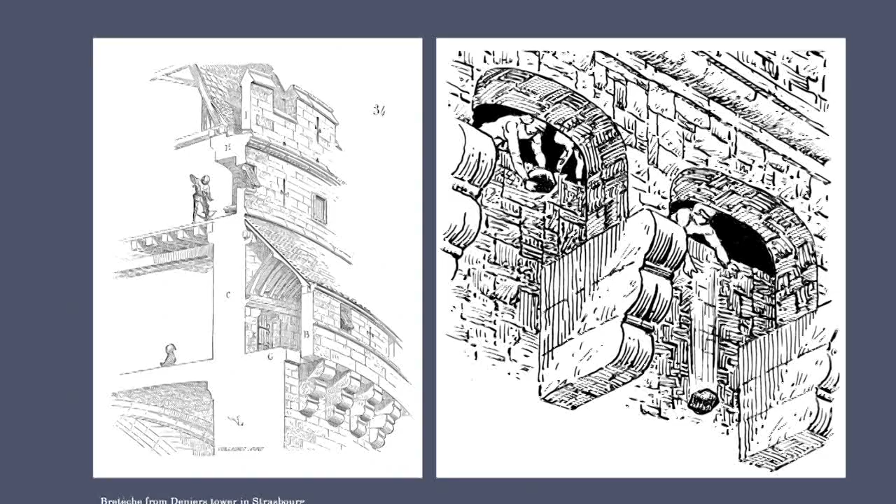From this cantilevered urban element, projectiles could be directed at the enemy, as you can see at the right-hand side of the image here. Soon, however, the balcony would become a more generalized urban element, no longer a place from where to attack people, but rather to address them, be it still from a very elevated and powerful position, as we can see in the St.

In other places in the world, the balcony seems to have evolved as a special form of window that establishes new relations between the street and the dwelling. The Egyptian balconies with mashrabiyas are a prime example of how a very nuanced but also very dynamic relation between the domestic sphere of the house and the civic sphere of the street was negotiated or is negotiated. The balcony with mashrabiya regulates the way that the domestic sphere of the house is in touch with the civic realm of the streets, but also vice versa. It controls the degree to which the public gaze and sound enter the sphere of the house.

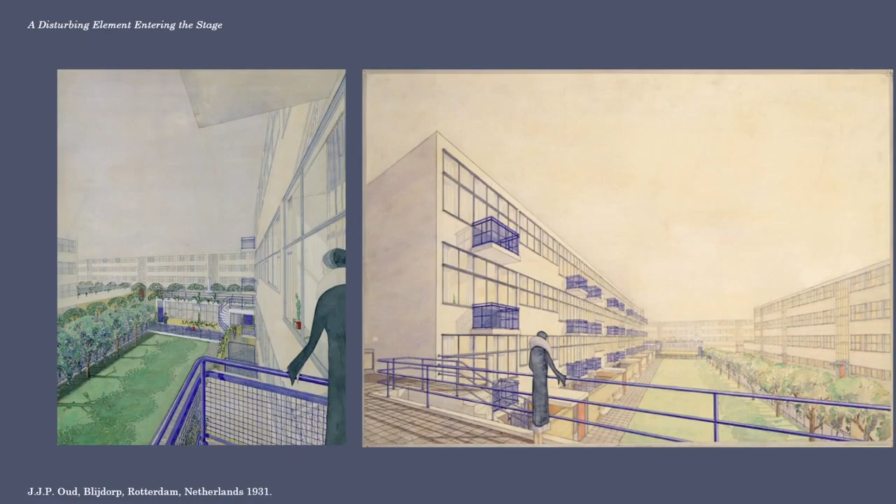Surprisingly, in the 20s and 30s, the balcony would gradually get a much more central place in several modern architectural discourses and practices. It became a sort of conspicuous feature of the modernist house, but also of the modernist city, as you can see here. Also in post-war architectural culture, the balcony would start to play a very important role in dealing with pressing urban issues. The balcony, for instance, became the architectural element par excellence to deal with the relation between the mass and the individual in a wide variety of housing projects.

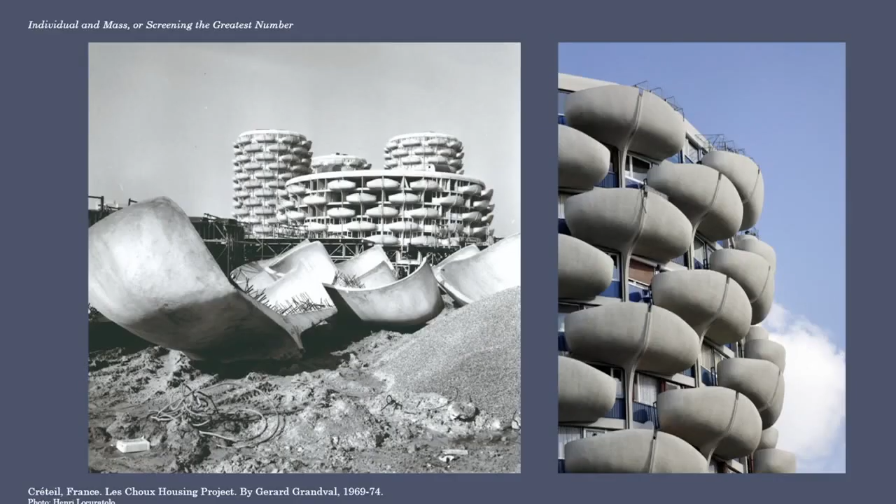The French architect Gérard Grandval offers an interesting example in his housing project called Les Choux in Créteil, near Paris. The challenge in these types of projects was the engagement with the new collectivity and the anonymity that emerged from these housing environments for an upcoming mass society. Supported by the evolution of precast concrete in France, Grandval proposed a system of petal-shaped balconies, which gave the buildings their unique appearance, but above all, installed a new figure of screening, the border between the realm of the individual and that of the mass, allowing as well a sort of visual engagement with the public realm of the city, and offering a high degree of privacy to the individual.

Almost simultaneously to Grandval, the Spanish architect Ricardo Bofill offered his view on the encounter between mass and individual, between monument and niche, we could say, for the housing project in Barcelona, the so-called Walden 7 project. In the Walden housing project, the monumentality of the apartment buildings is emphasized by treating them as a very big form, a gross form as we call that, with enormous cavities, as you can see.

And also here, the balconies played a crucial, and we could even say a paradoxical role. They appear as elements that remind, on the one hand, of a long Mediterranean tradition of outdoor rooms that complement the interior dwelling, but their small size also suggests a different reading. The balconies in this project, and you see them also on the plan, you can detect these very small balconies as well.

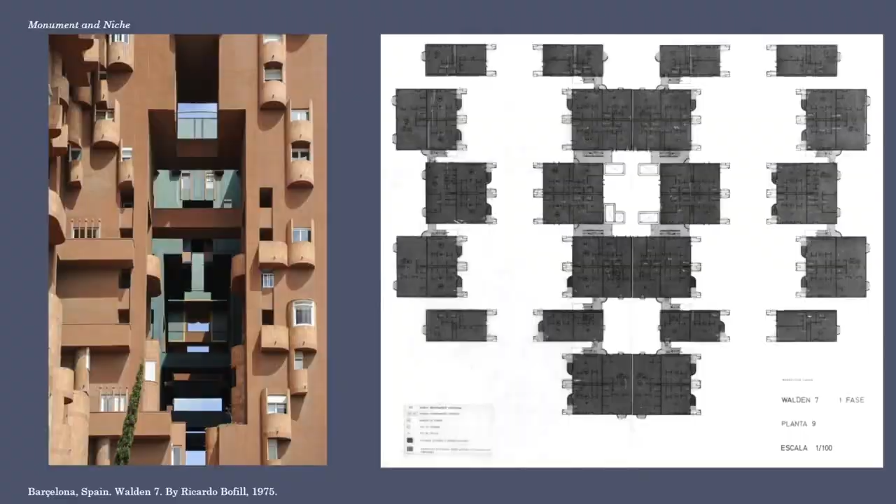The balcony would also play a very important role in the emergence of a new urban figure in the European metropolis, the urban figure of the modern skyscraper. And this was, for instance, the case in the project Torres Blancas by Francisco Javier Sáenz de Oiza in Madrid. Sáenz de Oiza was concerned with articulating a new collectivity and was interested in defining the European typology of a modern skyscraper. He imagined the balcony would play a very important role in bringing this typology of high-rise dwelling in tune with European ideas of collectivity and of the local climate as well.

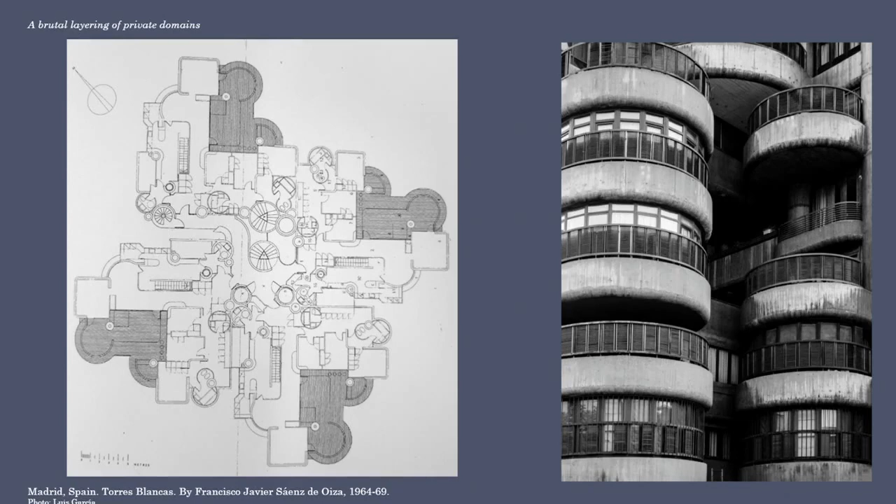The balcony would play an important role in acculturating, we could say, the typology of vertical living to the culture and climate of Madrid or of Spain. Sáenz de Oiza provided all of his apartments with generous circular balconies, as you can see from the plan to the left, that would not only provide space to the South European outdoor family life, but also provided spaces of outdoor shade to the various apartments. The result was a newfangled typology and an outlook of vertical living for the South European city.

That balconies are important mediators between the public and the private realm was also explored in post-war architectural projects, and this time by French architects working in the North African city of Casablanca, Morocco. The architects in these projects focused particularly on the borders of the balcony and explored how this could be understood differently from different cultural perspectives. In the drawings here, we see how these architects distinguished between, to the left, what they called Muslim dwellings, which have a very strong visual and sound border between the public and the private realm. And so the balconies, as you can see, hopefully, on the drawing to the left, have very, very high walls, let's say.

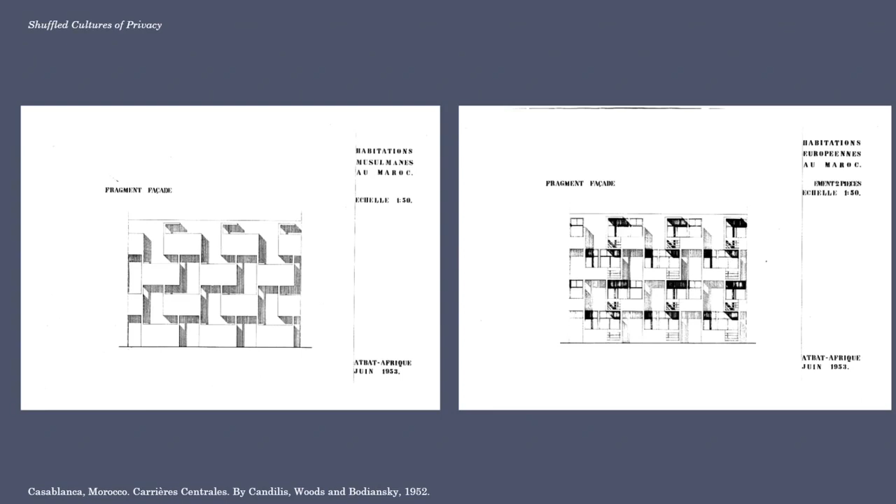And they were differentiating this with what we see to the right, where they were planning for European inhabitants, and where they believed that the border between the private realm and the public realm was a much more transparent, a much more osmotic, you could say, relation, relating to a very different articulation of the borders of the balconies. So this relation of the private and the public leading to a very particular way of dealing with the balcony. I'm showing you here some of the balconies with these very strong borders between the private and the public realm that were made for the Muslim dwellers of Casablanca.

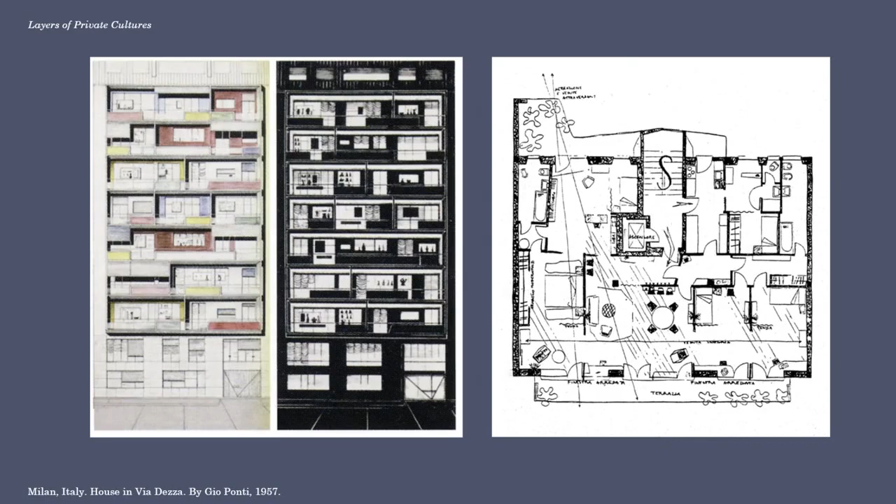Ponti is referring here with his design to a tradition of subtly screening the border between the house and the city, which was already present in the Mediterranean area, but he's in some way modernizing that, we could say, and he's designing his balconies as a set of frames that allows the inhabitant to mediate between the public realm of the city and the private realm of the house. In these frames, various elements could be posed, elements that are more artifactual, elements that are more screen, and together all of these elements mediate between the public realm and the private realm.

Ponti called this inhabitable viewing frames and believed that these viewing frames created a set of frames and surfaces between the public realm of the street and the private domestic realm of the house, projecting that in various conditions.

Last but not least, quite a few architects in the post-war period believed that the balcony was also a site of everyday politics, a site where inhabitants could have their single voices heard, and where they could have a say in the co-production of the city. This was, for instance, the case of the Spanish architect Antonio Coderch, who was speaking about sharing responsibilities and the co-production of the city already in the 1960s.

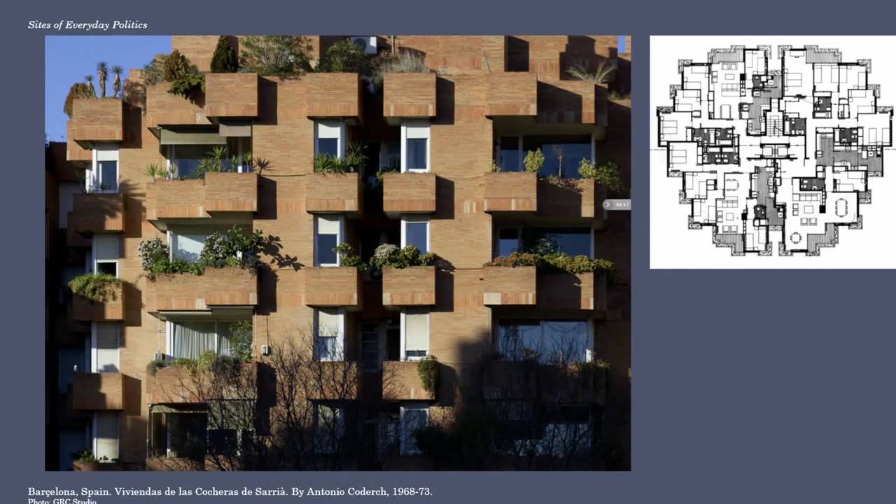In his proposal for the Viviendas de las Cocheras in Barcelona, the Spanish architect illustrates how this can be implemented in an urban design strategy. In his projects, the balconies are understood as polyvalent spaces in which inhabitants can interfere, if only by choosing a certain set of plants, a certain set of greening for the city.

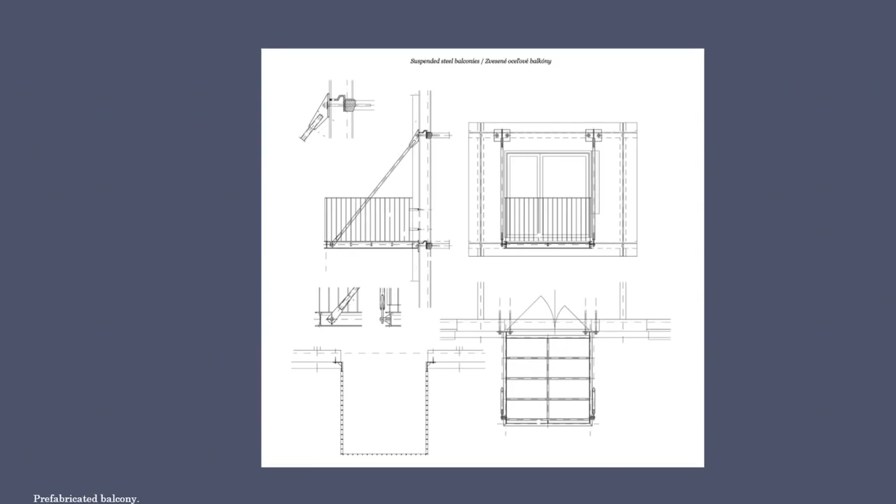That the balcony did remain an important urban element became, in my mind, clear in the beginning of 2020, when the COVID pandemic hit the world. As part of the attempt to mitigate the COVID-19 pandemic, many citizens were from the beginning of March 2020 advised to permanently remain within the private domain of their home. In an unprecedented intrusion of the state in everyday life, citizens were required to restrict their use of public space as well as their public interactions to the bare minimum. Slogans such as confinement and social distancing became part of the ordinary discourse on the city.

Luckily, dissociating citizens from social life and from the public sphere is in contemporary societies not docilely accepted. On the contrary, citizens all over the world have searched for alternative ways to appear in public, for other ways of meeting their fellow citizens, for other tactics to share. Sometimes this was done through digital channels, as we are doing right now, but very often they did that in an analog way. And in my mind, there was one urban element that played a key role, namely the balcony.

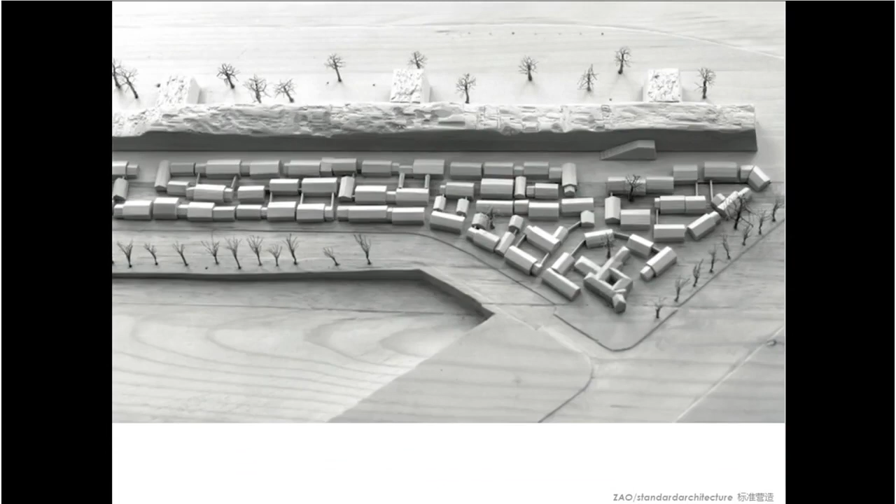This first project I show is not totally part of the micro series, but this is the competition I won that brought me back from New York to Beijing in 2001, the City Wall Park competition, which surprisingly was the first competition I entered after graduation, and we won. As you probably know, the old city wall of Beijing was demolished in the 50s and 60s, and almost everything has been demolished.

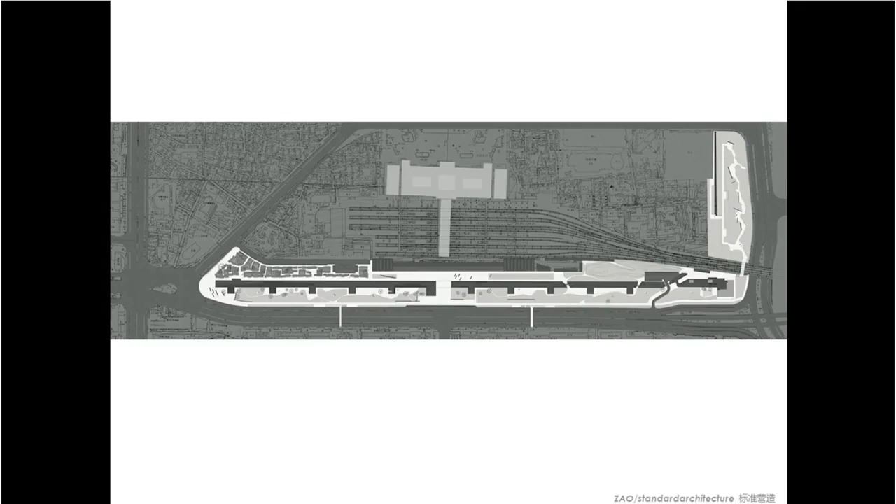By the year 2000, the government suddenly discovered a segment on the southeast corner of the old city, immediately to the south of the Beijing railway station, was left. It was about 1.5 kilometers. It was kept because the construction workers built huts around it when they were building the railway station. So by 2001, the city started an international competition to talk about what we should do with this. The brief asked teams to propose what to do with the city wall, its half broken part, and the relationship.

In the competition, we raised the question of why we are doing a project on the wall, which means the raison d'être of the whole project, why we need to do something to the wall. So of course my proposal eventually was really about, let's not do anything to the wall, because the most fundamental question of this whole competition is about the wall as it's left.

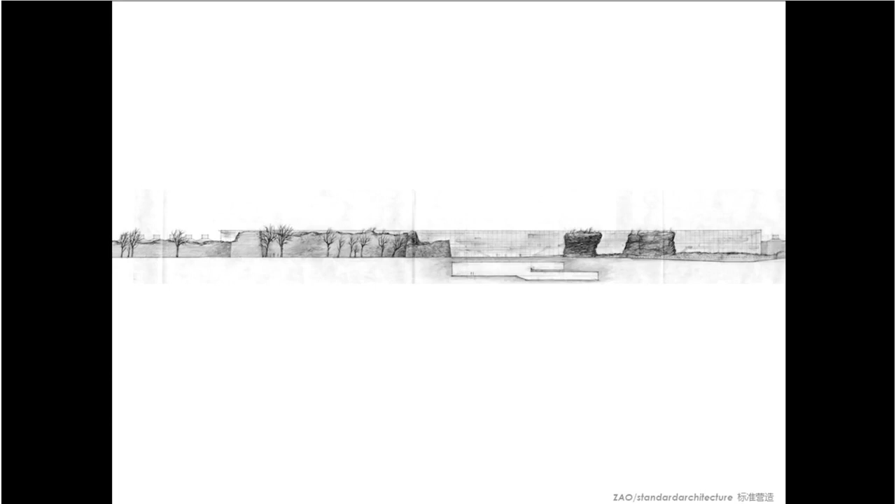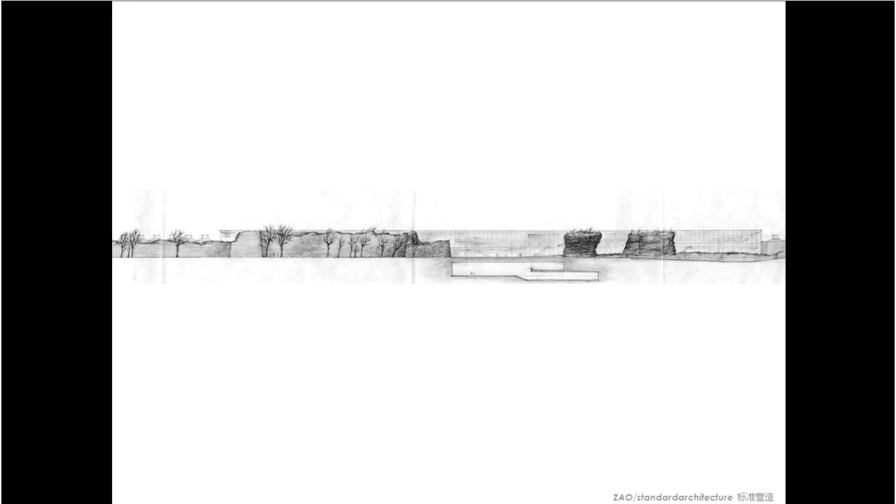While all the other proposals were proposing a glass wall, laser wall, curtain steel wall, water wall, my proposal said, no, let's not do anything to the wall. Let's spend the money to build public space around the wall. All the trees on this pencil drawing were surveyed on the site. And where the wall is almost invisible, I proposed to dig 2 meters to expose the huge stone foundations of the wall, and to propose public spaces where the wall could become a background for an international art festival or design festival for Beijing. By 2001, no events like this were imagined by the city. Now there's a design week, which is very active in Beijing.

So we won the competition. That's what brought me back from New York. But this gives a chance to do it innovatively. Here, in terms of detail of the landscape, it's not so exciting, but as public space, on the weekend you see old people dancing at the corner where in the beginning I proposed an outdoor theater.

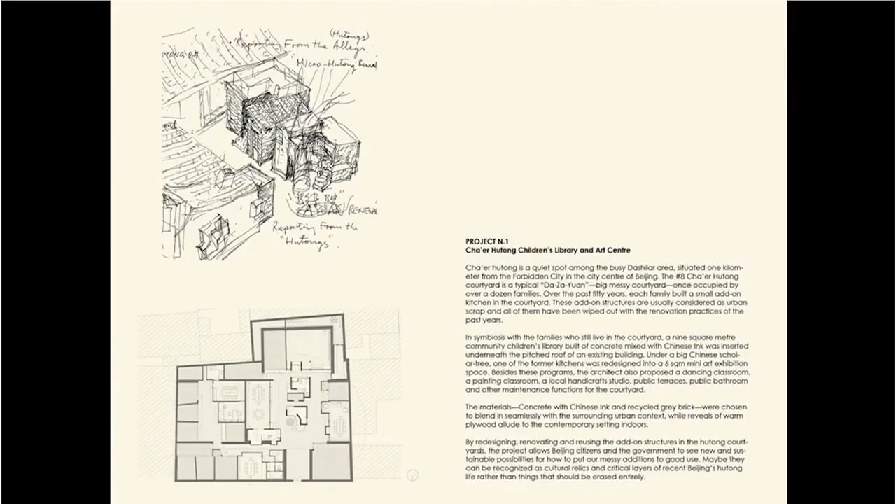It's a very beautiful urban fabric, but at the same time has lots of problems, because the living condition there is really not good. So this leads to our first project, Micro Yuan'er. Here you can see the area. It's right to the southwest of the Forbidden City, and this is the site of the project. It's a very typical, as I introduced, big messy courtyard.

On the lower left, you can see an existing plan, and this courtyard was occupied by more than a dozen families, and each family occupies around 10 to 12 square meters of space, and in the past few decades, they all started to build their own small additions as kitchens. Although it looks really messy, and it was, the space nevertheless has been very dynamic and attractive.

So the typical method, 99% of the conservation or renewal methods, or the official method, is to remove these additions, going to the lower right-hand plan, which goes back at least 100 years. But this was still considered the correct approach. But my question was: what is our contemporary urban history? These people who have lived in this space all their life, were those traces of their life and their creation fated to be erased? Is there a contemporary history of our urban condition?

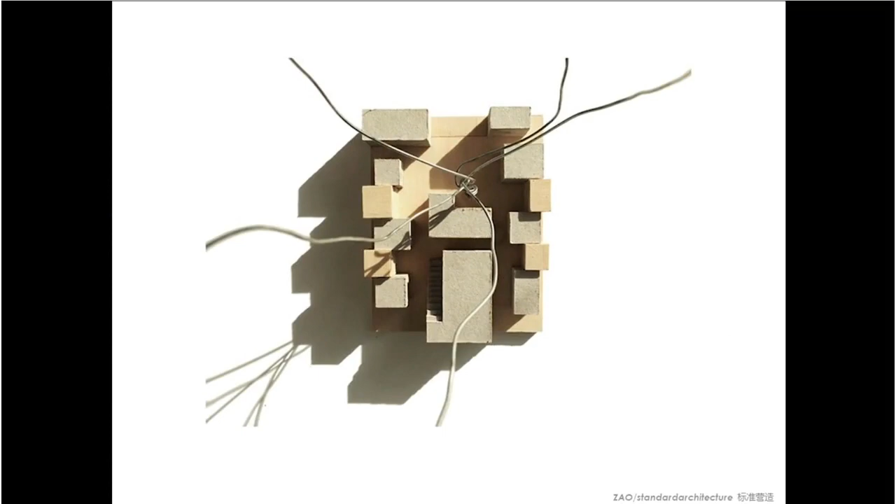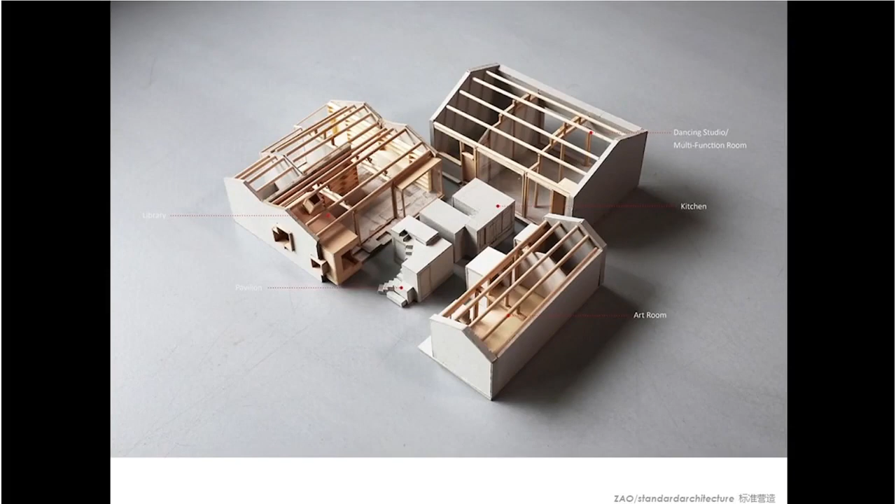So our proposal, shown on this early study model, was that because these were owned by different families, we thought by redesigning, renovating and reusing some of the existing structures, which were their own kitchens, it might be possible to create new public and semi-public programs within the courtyard. Of course, the most fundamental question was, what is needed? Do they really need those spaces? Were we proposing something only we thought was important, that the neighborhood doesn't need? So we spent a lot of time trying to think what is missing.

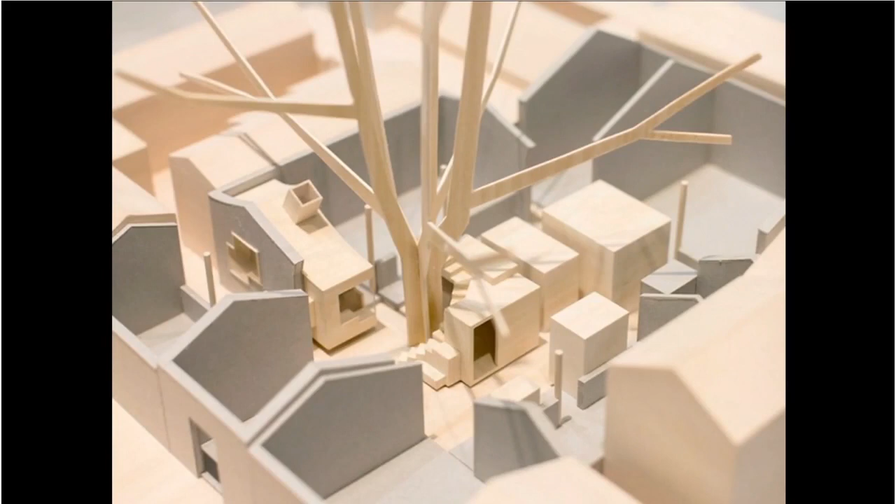We used a children's library, which is 9 square meters, and we also redesigned a 6 square meter art space that wraps around the big tree. Later we had 2 new bays of this building available. We propose a dancing studio and multi-function space here, a communal kitchen here, an art room here. Altogether, the space is still less than 200 square meters. And here is a model of how the project started to evolve.

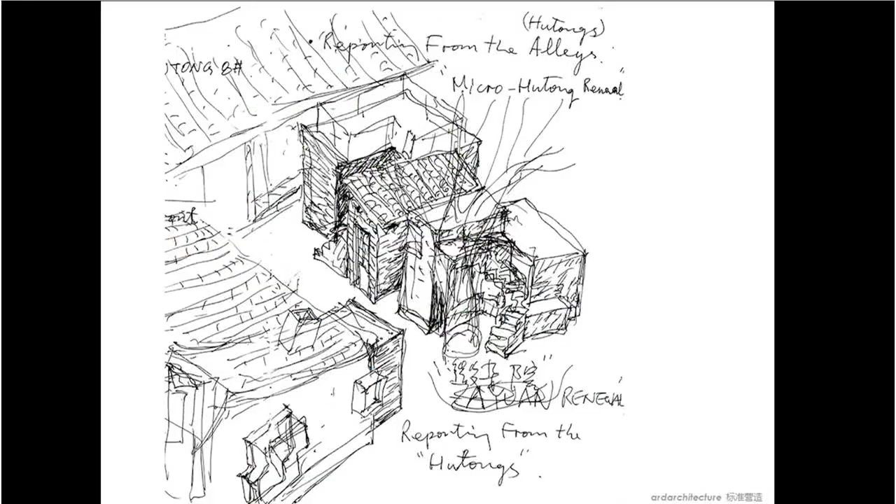After around 2 years of study and even a plywood mock-up, we started to really build. The first one was, of course, this inserted concrete little library, 9 square meters. And then this art space and the communal kitchen. In between, there is still one kitchen conserved. It's still owned by one of the residents who still live here. These are some sketches. I will just have to go fast.

For this 9 square meter space, I actually spent more time than on a 10,000 square meter building project, because smaller projects are like playing solo in a concert. If you make any small mistakes, everyone will notice. So all the scales have to fit, both for children and even for adults. And

it's interesting that children immediately find all different ways to occupy different spaces in their own way. In the past few years, especially the year before, we organized over 60 events. There was an event almost every week or every other week. Children interact with artists from around the world.

Since I don't have too much time, this is paper cutting, and some other events of projecting with their own paper cutting. Improvising, music and art. This was before Halloween. Children of the neighborhoods cut recycled cardboard, and then make their own costumes and march in the Hutong.

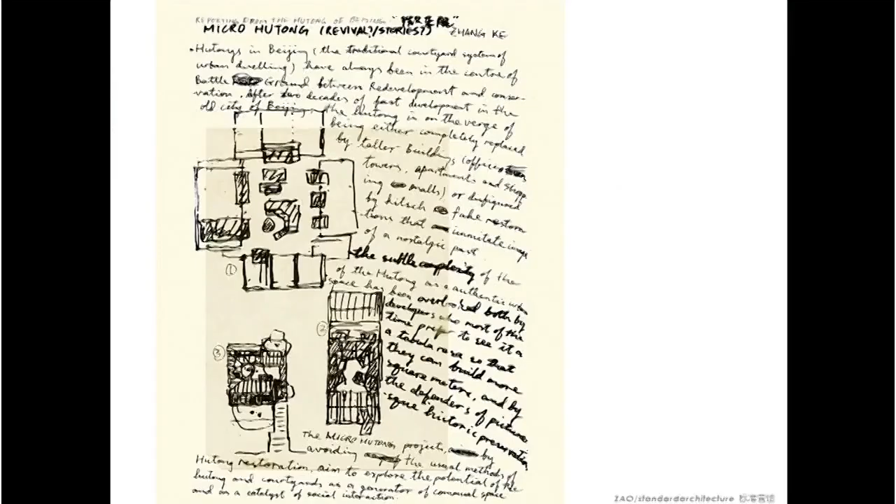So there were many events, and in the design week, there are still a lot of events happening there. Next, I'm going to quickly show a few images of how we brought this project to the exhibition of the Venice Biennale in 2016, which was curated by Aravena, who is also doing a talk here today.

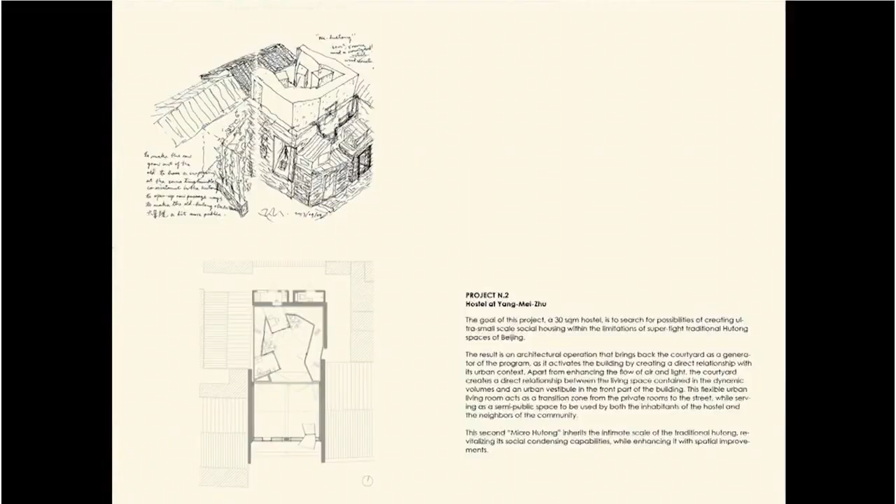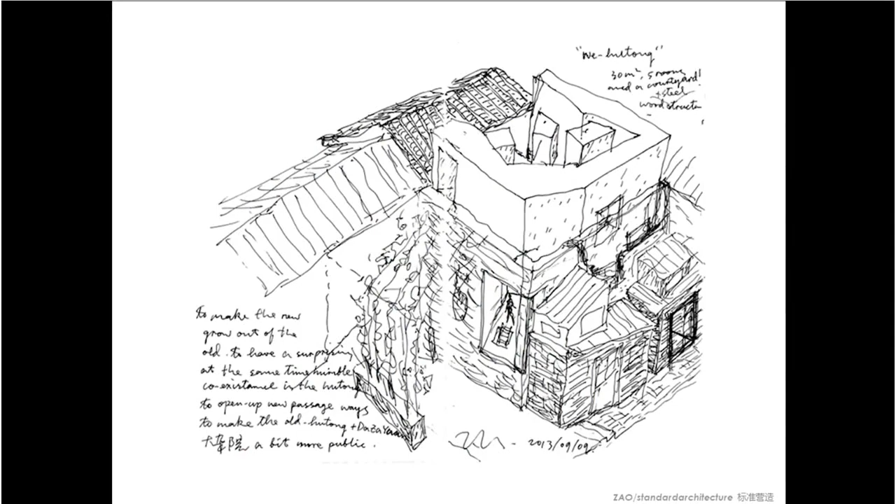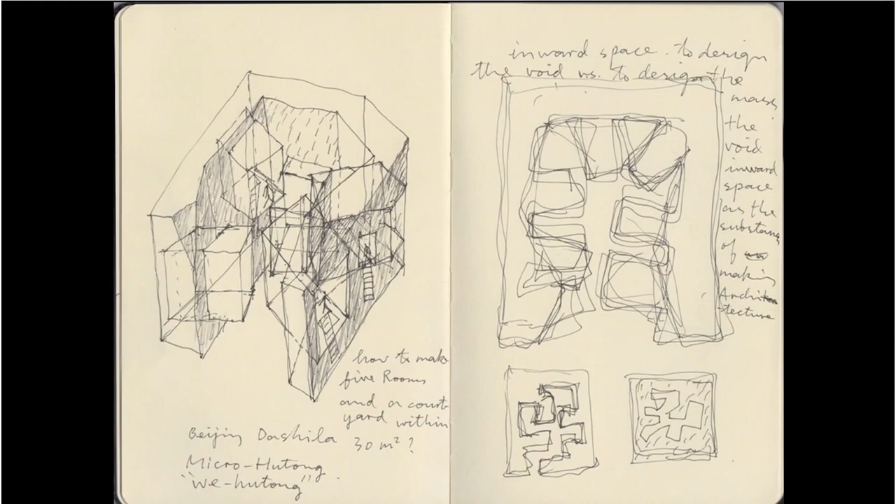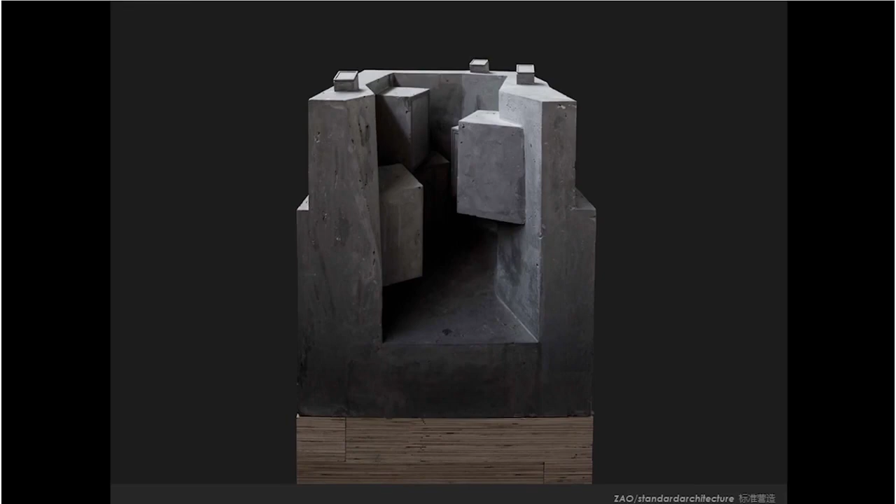The second project I would like to show is called Micro-Hutong. It deals with a new issue of the old city, which is extremely tight space. This house is only around 30 square meters. So the question is, how do we create a house in a very tight space, but in a new way, with a few bedrooms, a toilet, and is it possible to also create a courtyard? And all this is within the height limit of the old city. So we call it Micro-Hutong.

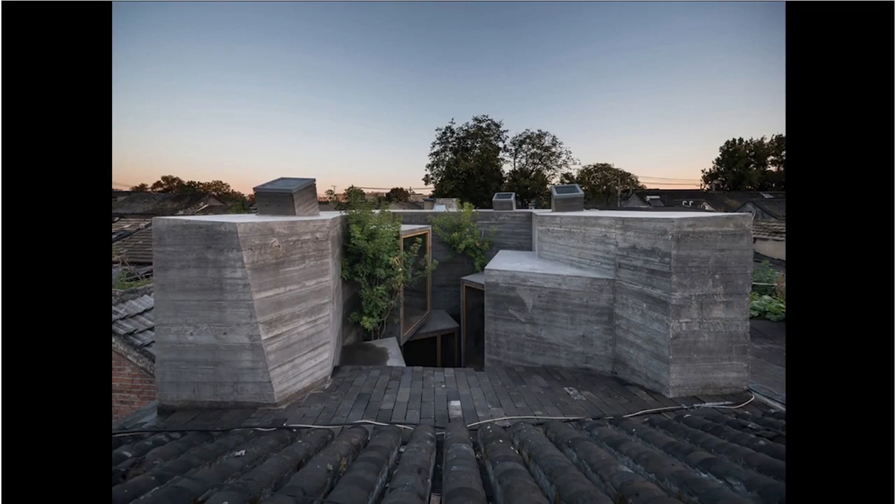Within this 30 square meters, here is a threshold. I think the threshold is one of the topics that we are talking about today, homes in the street. So it's a house and a hostel at the same time. In the front, this formerly indoor space we deliberately designed as a semi-outdoor space, so that communities and events could happen here. On the back, by stacking or spatially shifting the height of the boxes, we created two living rooms, one study, one toilet, and one dining space.

And of course, all the spaces have floor heating, central aircon, and also operable skylights for ventilation, etc. And we planted 2 trees, and the trees have been growing in the past few years. In a decade, it will become a tiny little house at the foot of a huge tree, like the Japanese cartoon Totoro story, I imagine. I won't go too deep into the details of the projects. I'll just quickly show slides. You see the trees start to take over, and the house will eventually be all covered under the canopy.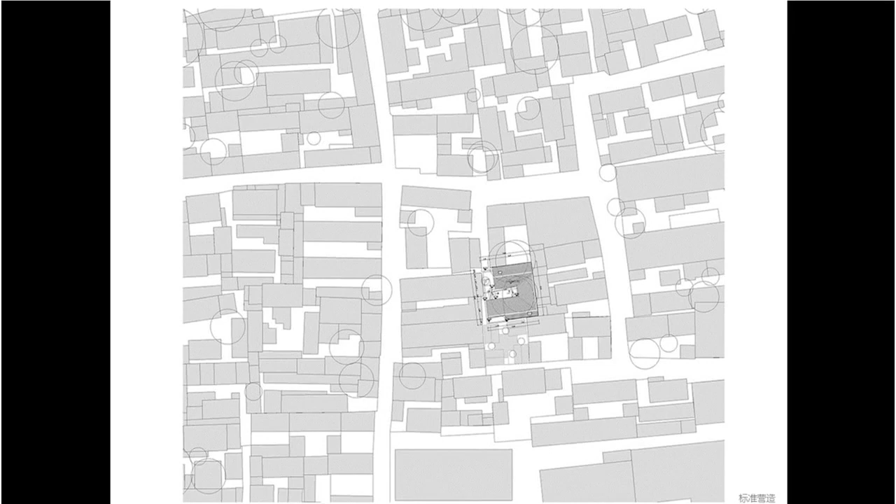The third project deals with a more general question. Unlike the second one that has a striking form, in this one we were trying to think of what we can create that could be applied to every renewal project. This comes to the basic question: what is the most needed thing for the old city, for the people who live in the old city? So it comes to this Baitasi area, where we have an existing courtyard of about 90 square meters.

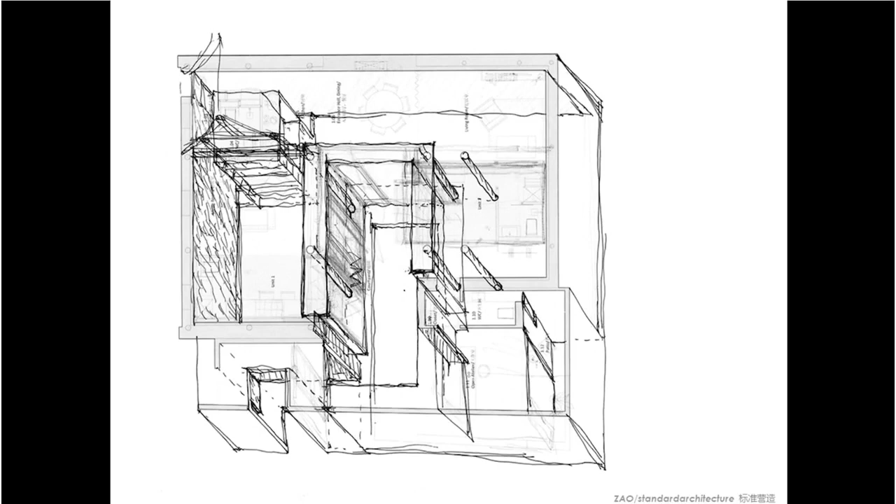Some of these people moved out, and for this courtyard, our answer of what's most needed for every courtyard is the core of a house, which means a toilet, a shower, a kitchen. So instead of creating the form, we are saying maybe we should create a core that could be inserted into every old house, be it in Beijing or in any old city around the world.

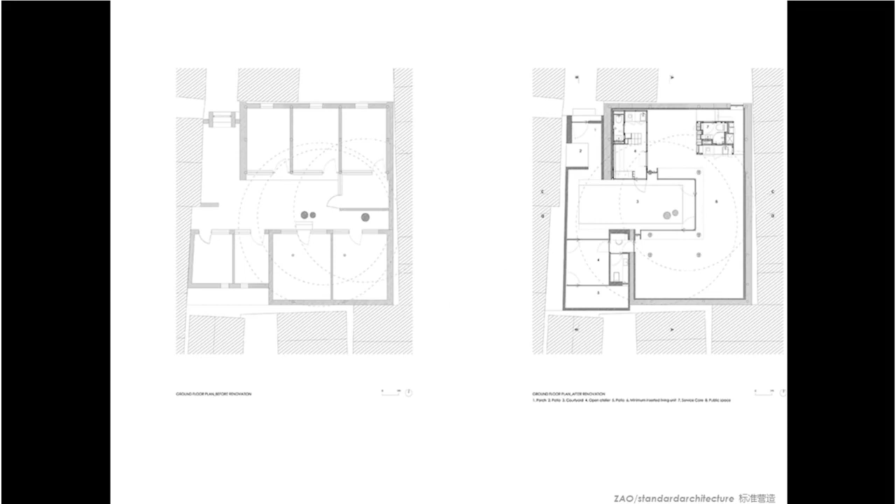So our proposal here is really more about inventing a core of a house. So we did this with a 4 square meter, 2 meter by 2 meter functional core that can fit into every room.

So I would go about the architectural approach here about creating several courtyards, and then the existing brick wall with the new concrete, and the layering of space, of history which is still visible. The functional module here is the most important thing. Now the house is rented to a novelist who runs a children's education program.

But the core, the functional module here, is we developed this, we call it the world's smallest core of a house, which has a toilet, a shower, a kitchen, a fridge, everything you need, and then on the top is a king-sized bed. We actually even got a patent for this. So this is the functional core that's built.

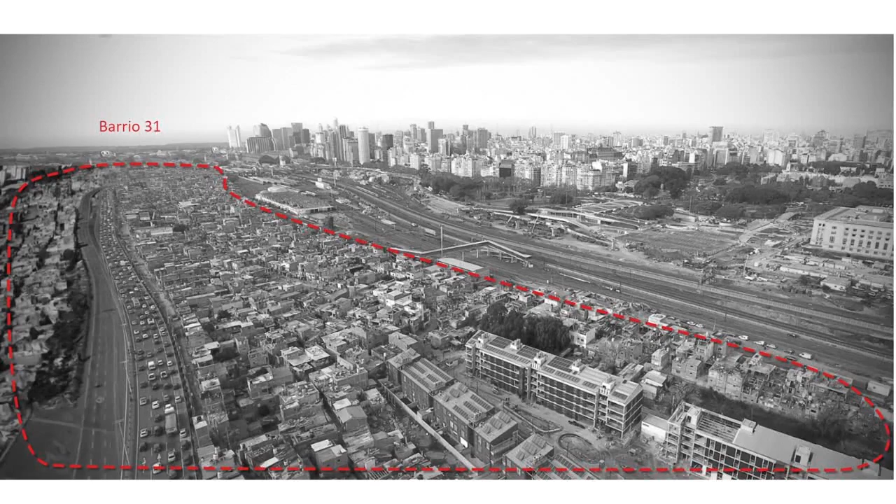We were looking at the slum, and you may all know what it looks like. This had some slightly different conditions. It's rather high, so 4, 5, up to 6 stories. So it's a very dense neighborhood. Public open space was the scarcest resource.

There was a very important highway, the one that actually leads to the very core of Buenos Aires. It's running on top of this slum. And this is the one that comes from the local airport. And you see there the height of the buildings, it's more or less the same height of the highway. And people living not just close to this infrastructure, but actually even underneath or in between the highway that is

The first generation of informal settlers may have built on the ground floor, then they rent and build first and put a stair and rent a second story of illegal occupation, and a third and a fourth, so on and so forth. You see there the very fragile and poor infrastructure, wires, access to electricity, yet whole families are here looking for better ways of living, a better future.

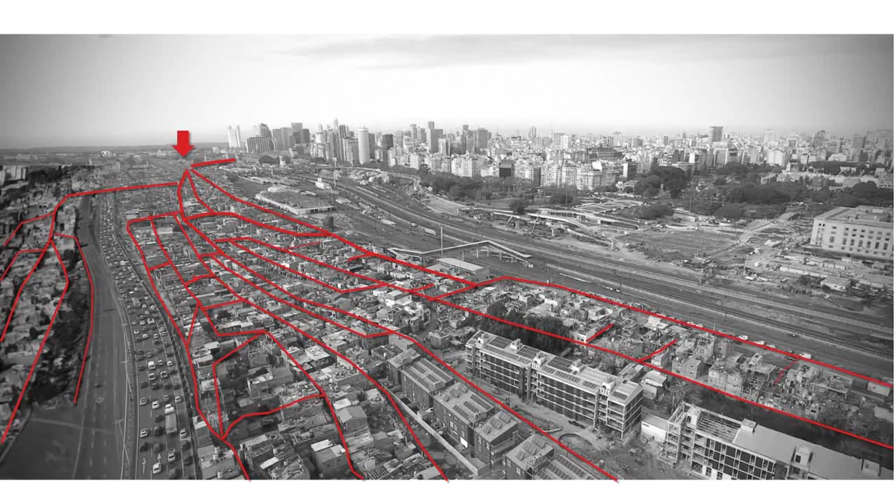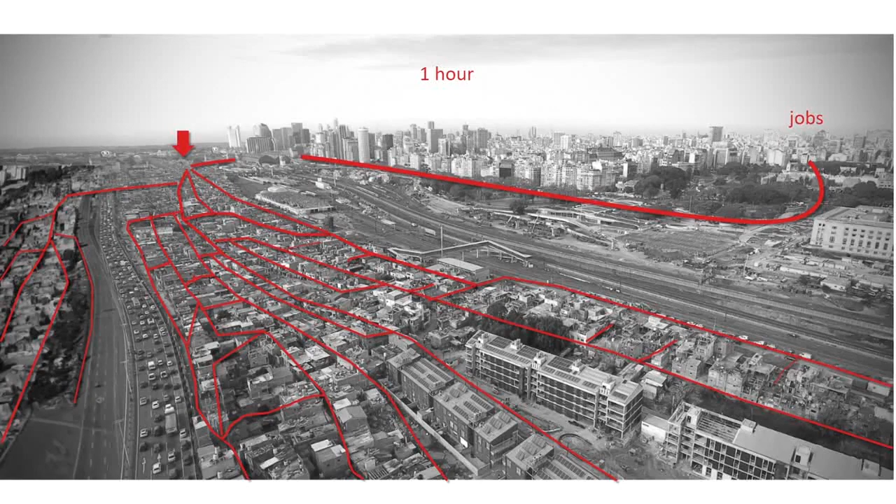So one of the particular aspects of this slum is that this 50,000 people neighborhood has just one single entry and access point in the very north, close to the main train station, and actually it's known as the Retiro train station, where the arrow is pointed there. So it's a bottleneck that every people has to go through in and out. People have to walk to their jobs, and within 1 hour is where those jobs are.

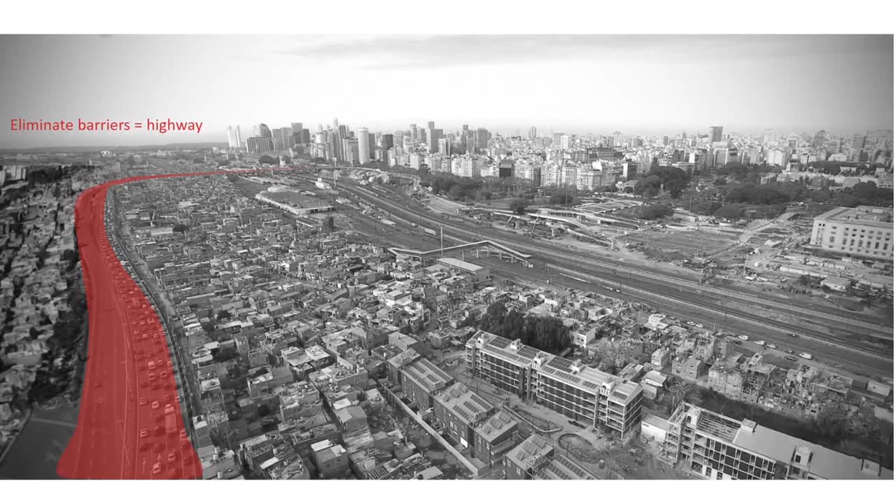The highway was identified by the government and the plans as one of the barriers that had to be eliminated if they wanted to improve living conditions. There were safety issues and the closeness, and particularly those living underneath the highway. So there's a plan to remove the highway and transform it into a kind of highline, an elevated public space that is, as I was saying, the scarcest resource in this settlement, and it's going to be relocated.

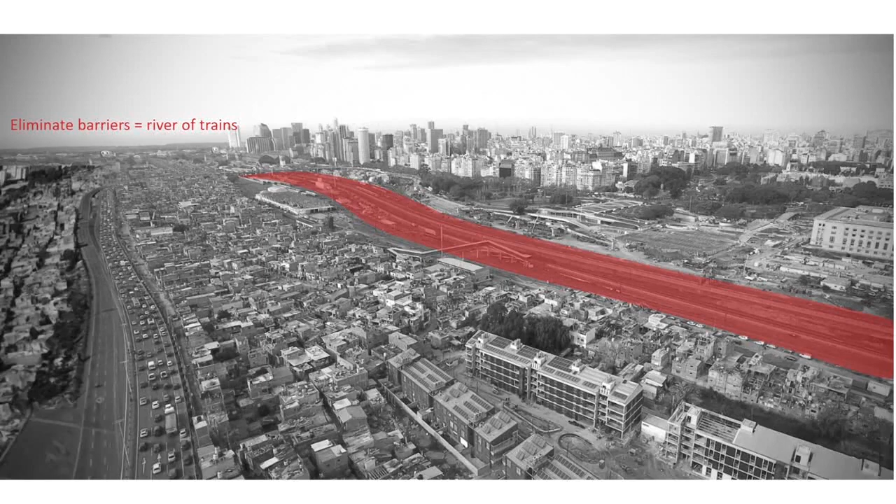But what we thought was the more important barrier that had to be eliminated is described actually by the city as a river of trains. What made it impossible for the people to access easily those jobs that are on the other side of this river of trains was the fact that there was no connection. Everybody had to walk to that very end and then go back to the formal city.

And this is the moment where, well, can we do something with our own headquarters and put it in the neighborhood? And as I was describing, we were prepared to lose the job by recommending that that would not be a good idea. Or let's put it this way. We said to them, unless you ask the city for 4 conditions under which the project may eventually produce the desired development. First one is to elevate the building, not put it on the ground level, and this even to comply with the standards.

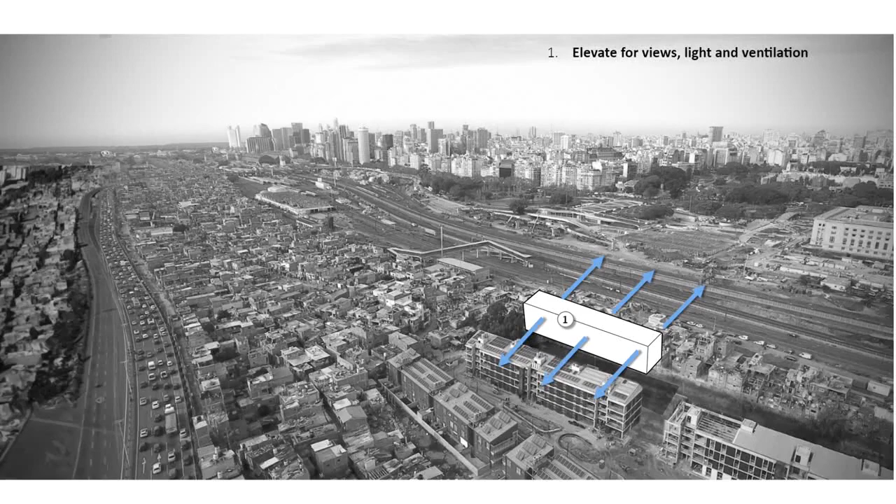The bank main headquarters are in Washington. They do have to follow certain standards and procedures in terms of natural light, ventilation, views for the working conditions for the staff. So it would have required to be elevated, and that was not within the new set of rules for the master plan for the neighborhood improvement that the World Bank was financing. So it would have to create a special rule to be able to be on top of the existing built fabric.

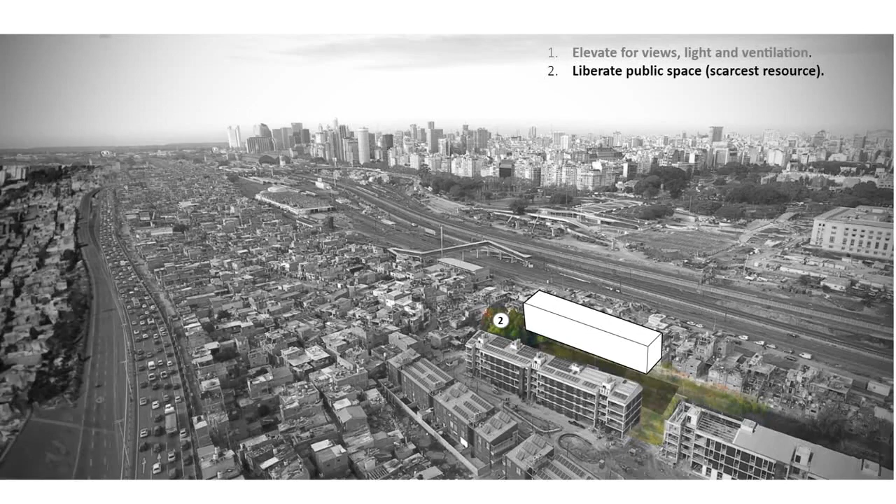It also would be desirable not to occupy what is most valuable in the neighborhood, which is open space. There was a very narrow green area, one of the few available there, and it would have been a pity if the only open green space would have been occupied by the bank. So in case you want to come, we said, one condition would be do not touch the ground, put it on top and above at a certain height.

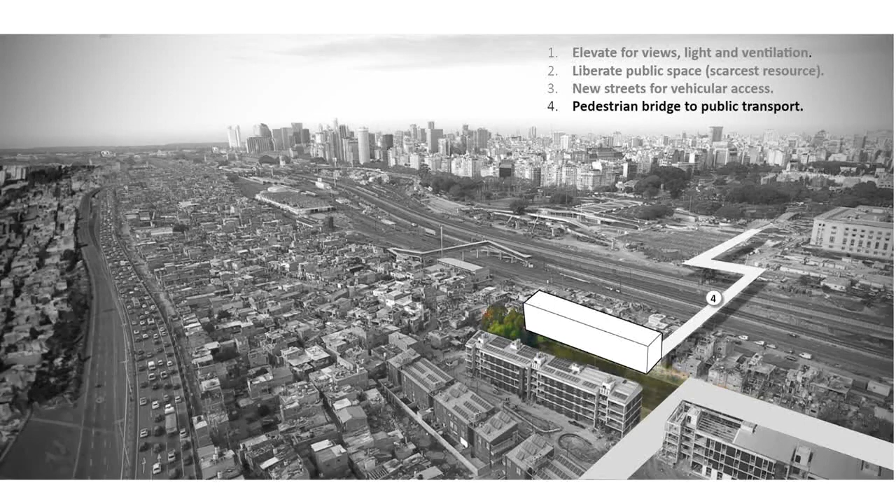Most importantly, there was the need for car connection. I mean, if not, your customers, your staff is not going to be able to even come to work. And the bank may make this gesture, but fail in the everyday operation. And finally, it would be necessary that the city builds a pedestrian connection to public transportation on the other side of the railroads, so that people can go back and forth between the formal city and the new bank.

So the problem with that is that the city had no capacity, no money, not even a jurisdiction to be able to build all these conditions that the bank would have required to work. And that's where we recommended not to do the building unless, and that was the tipping point in the process,

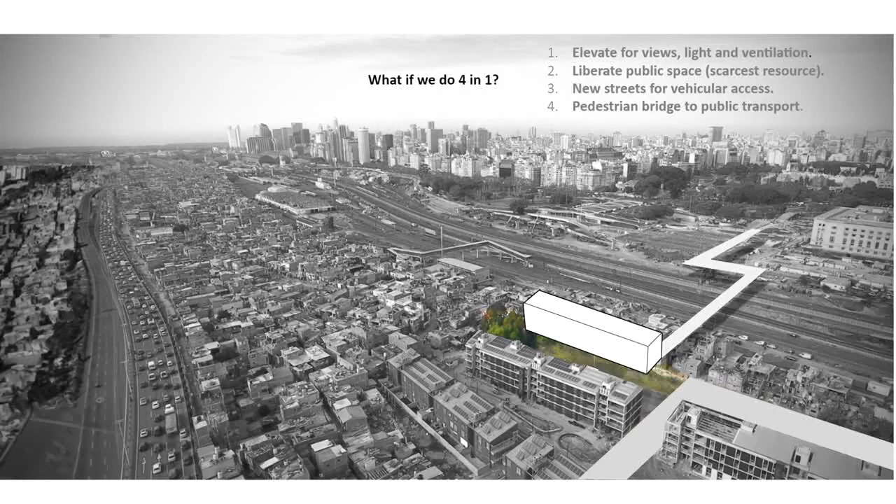we said, unless, what if the building, instead of asking for these 4 conditions, what if the building itself is the 4 conditions? What if instead of putting a building inside the slum, we build a pedestrian bridge with the bank that connects both ends? In that sense, one of the ends is going to be in the formal city. Parking, streets don't have to be built. Access to public transportation is going to be there.

But then given you're connecting both, then you will have to go up. You have to deliver a clearance for the trains and plus the new highway. So we had to be 18 meters above, and staff will have to achieve that height with some mechanical means. Well, why don't you open those means and allow the people from the neighborhood to use them, so the bank itself may give for free use what they need for themselves and create that communication.

In addition to that, we were working with these German structural engineers from SBP. We have been working in other projects, and we're talking about a 240-meter long bridge with a 110-meter span in the center. We couldn't touch the rails underneath, so structurally speaking, in addition to the 240-meter long structure, the toughest part was the center with a 110-meter long span. And the engineers said, well, we can do that.

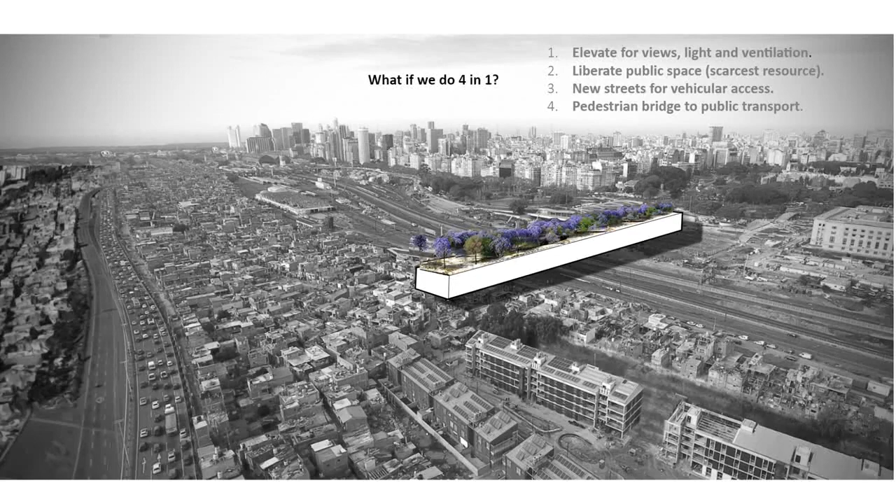So while using the pedestrian bridge on top of the railways, you would be able to have these views in a city that is rather flat. Buenos Aires, it's almost on ground zero. There's no geography going above. So the public, being in a public condition with these views around, was going to be a novel thing. And so this was our counter proposal to the bank.

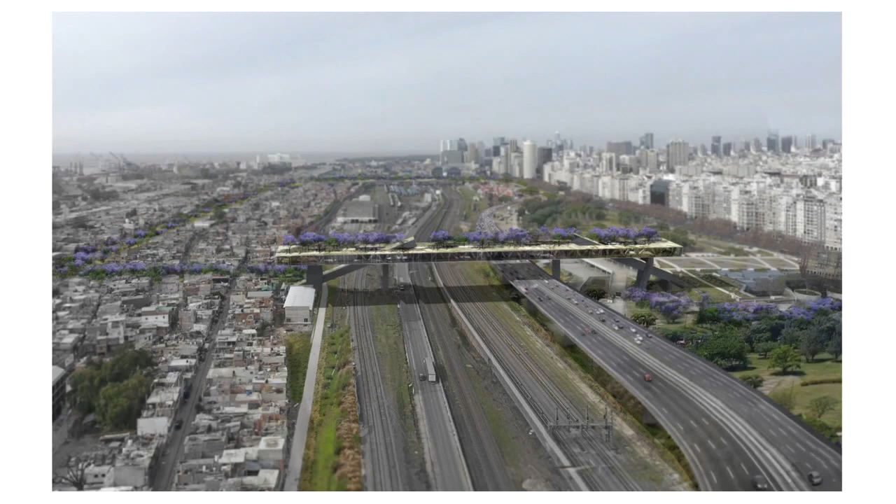To our surprise, the bank immediately saw that here, even though it was not even close to what they were looking for, rationally studying it, this would trigger the desired development. Actually, they measured it, and the existing condition was that within 1 hour, which was the case for the 50,000 people living in the slum, the access to those opportunities that cities concentrate: health, 3 institutions, education, 165, culture and recreation, and in general, for the qualification of the workers, let's say 300,000 job places.

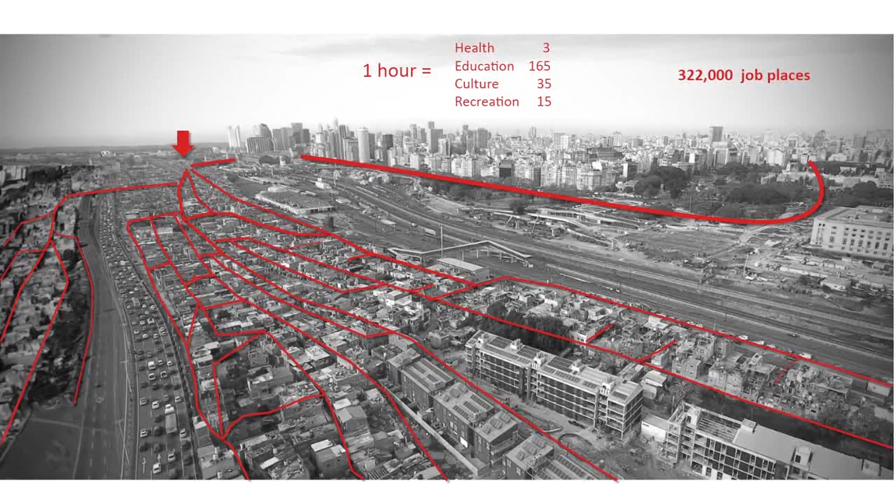When building the bridge, because of the shortcut that we were providing, we did that same hour. People that are so poor that they cannot even afford public transportation. So by walking, the access to jobs was multiplied by 4, to health institutions, education, culture. So the value creation, and this was the kind of study that the bank, by submitting the project to the same parameters they use for the projects they finance, was able to prove to the board that it made sense to make such an unexpected move.

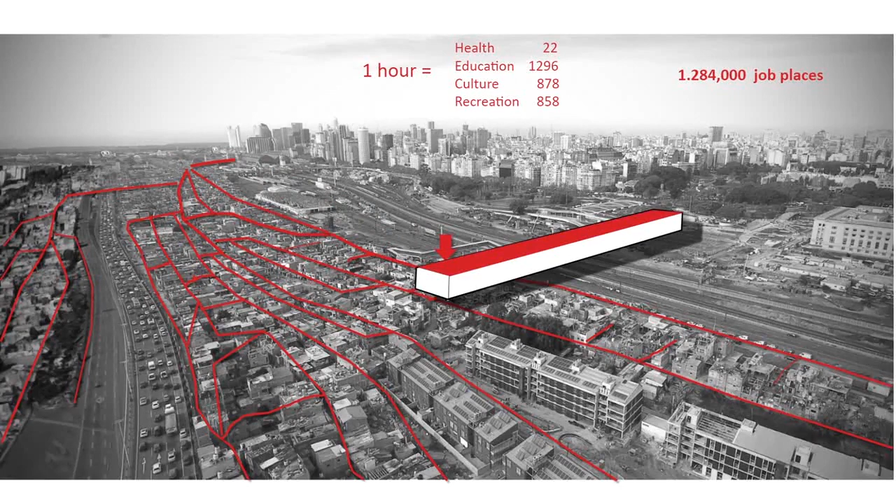And this is how the project began to move ahead, to be developed. It was not a very easy sell. You can imagine, go to Washington and tell people that this was going to be the place from this time on where they were going to work. But that was not exactly true, but because this is at the pedestrian level and because of the clearance for the trains, we had to be plus 18 meters. And this is what begins to appear at plus 18.

And once you frame that with the building, I guess this was the moment where, in the room where we were presenting to the board, a very impressive kind of UN board meeting room in Washington, we heard this kind of relief of people: no, okay, that's fine. We may be able to go ahead with that. They were a little bit afraid.

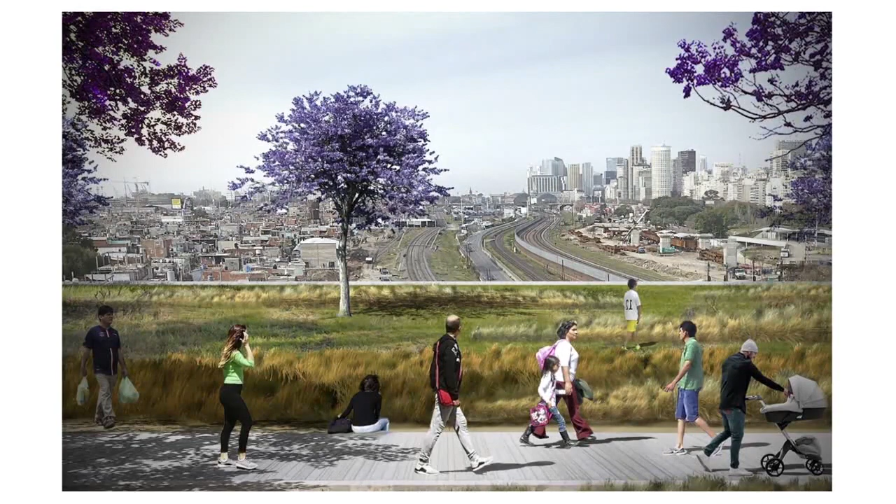But then when you begin to show the benefits, not just for the 200, 300 workers of the bank themselves, but for 50,000 people, if not more, and how they benefit both the rich city and the informal city from this more amicable exchange and a way on a daily basis to go from home to work and back, and also experiencing finally some quality of the formal city that they have been segregated from, that was the moment where the project began to win momentum.

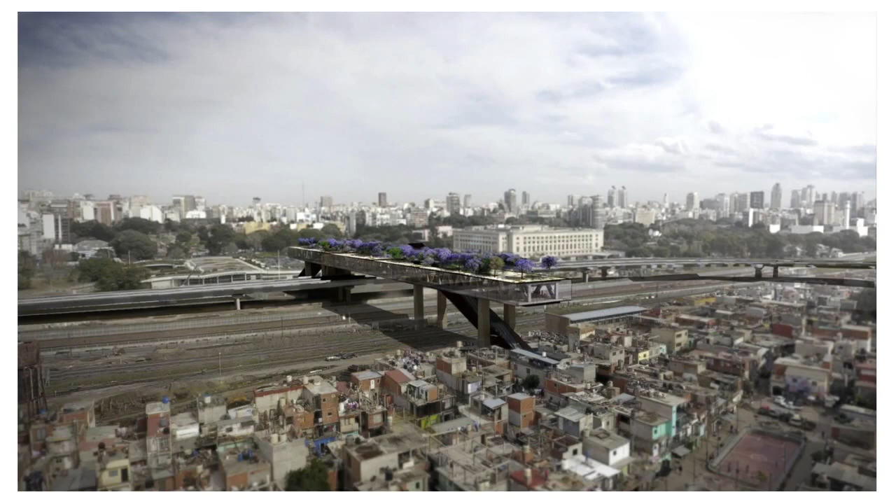So this is how the project was expected to look. Luckily for us, we were landing on the other side on the Buenos Aires Convention Center. So even part of the programs that the bank was expecting to hold inside the bank did not need to be redundant and duplicated and could take advantage of the existing infrastructure of the city. There was only one big work to be done, which is to modify a law in the Congress in Argentina to be able to use the air rights above the railway.

I mean, the city was able to invest in the slum because their jurisdiction allowed them to put money, but the railway space is national, let's say federal land, it's not city land. And of course, we would have never even considered having to go to vote in the Congress on a new law to make a project feasible, particularly in Argentina, where there's a history of fights between the presidency and the government of the nation and the government of the city. There have always been antagonistic political parties, so they tend to block initiatives.

So we discussed with the bank and tried to agree: are we willing to take the risk and bring this project to the vote in the Congress? And because of some surveys the bank was conducting, there could have been a 2-vote advantage, because for the first time in Argentina, we had a window of opportunity of 2 years where the president and the mayor of the city were of the same coalition. So we may have had this 2-vote advantage.

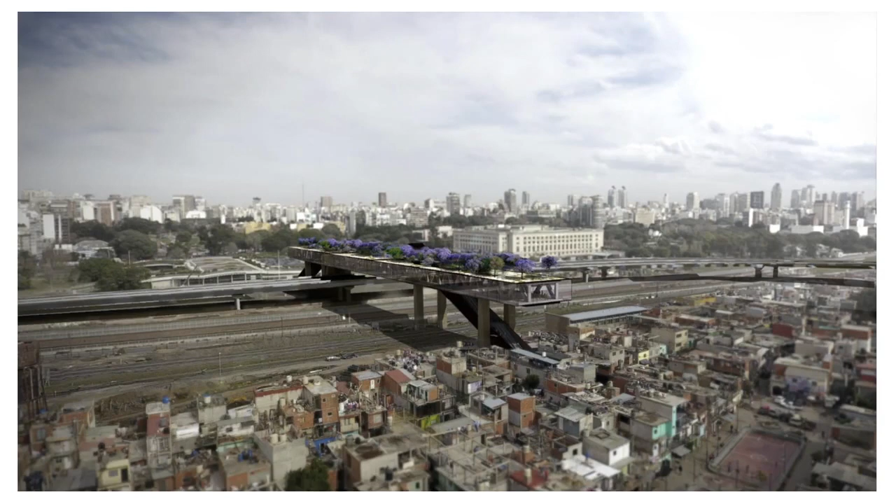We went to present to the Congress in the first hearing and in the second hearing, and to our surprise, the project was approved. The new law for using air rights was approved, 42 in favor, 12 against. And that's the kind of forces that architecture is able to channel instead of resisting or replacing. I mean, if you understand or are able to demonstrate a gain for everybody, well, the city may create alliances that in policy and politics may be less likely in a conventional scenario.

And I would say, going back to the other 2 L's that Rahul was mentioning, this is the power of design that is able to channel and find agreements. Of course, not always, but these moments eventually may appear. And of course, we're in times that are very complicated, a new presidency in Argentina, the pandemic, and a new president for the bank just being elected in Washington, and we'll see.

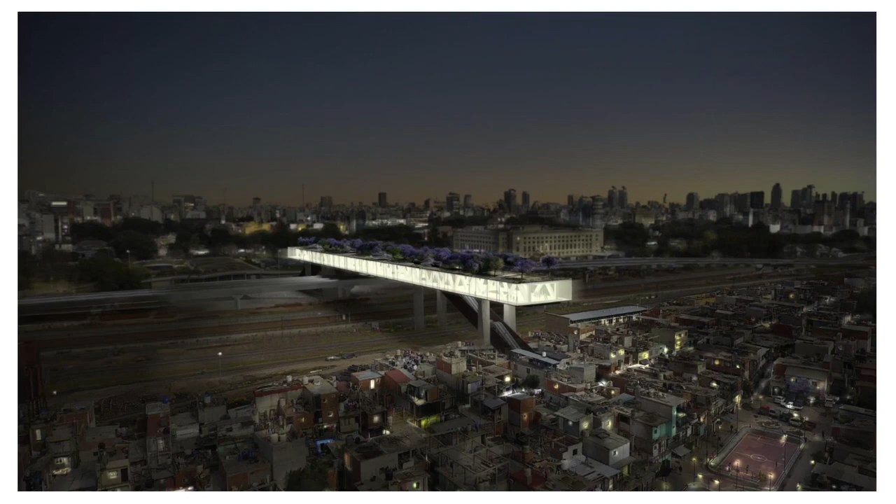But still, at this point, with this project, I guess I was able, in a very specific operation concentrated in space, to try to understand the bigger picture and hopefully introduce an outcome that was not necessarily what everybody was expecting. That's it. Thank you. Thank you, Alejandro.

Just hold on. Now, are we ready? Go ahead. Okay. Thank you.

Thank you, Alejandro. Thank you very much for that treat. No, it's a fascinating project. And I think I'm glad I used those words to describe you. And in this case, one can add to that to say, asked for a bank and got a park. So you've been consistent with the surprises that you have been springing on us in very positive ways.

And I think what struck me very much watching your presentation was how it actually resonates, because the components of a freeway, a favela or a slum, a train track, the downtown as a mirage on the other side, which you can see but you can't get to, the dislocation between places of livelihoods and living and the conditions of living, I mean, these are the components that are making up a majority of our emerging cities.

And to use the description that of course was invented in Bangladesh by a photographer of the notion of the majority world, where a majority of the world's population live, rather than the global north and south, which really we don't quite know what it means.